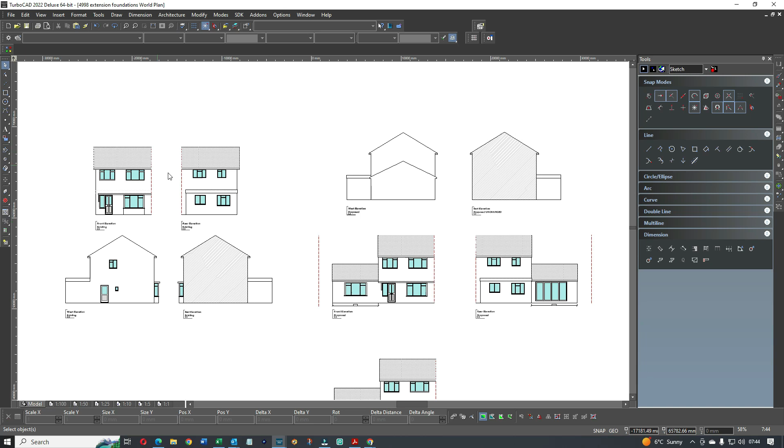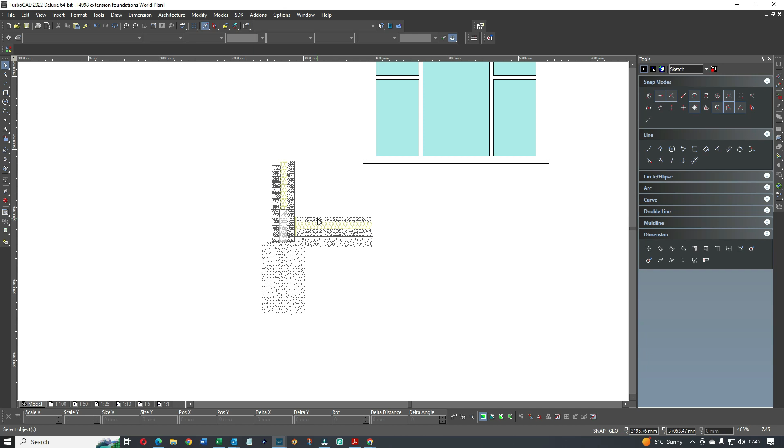I'm Tom Norris, and today we're going to take a look at trench foundations. Almost every extension you build will need foundations of some kind, and especially in the UK, we're looking at trench foundations for extensions of any kind. So what I've done here is taken one of our projects, a simple project where we've added an extension, and I've started to do a detailed section to show foundations for this particular property. Now it's not very pretty, but the idea is to give you the content and then you can work out how you want to do it yourself. If you're a young or budding architect at various levels of qualification, this would be pretty useful, because you're going to end up doing these, and it'll teach you what's required and what's pretty much standard.

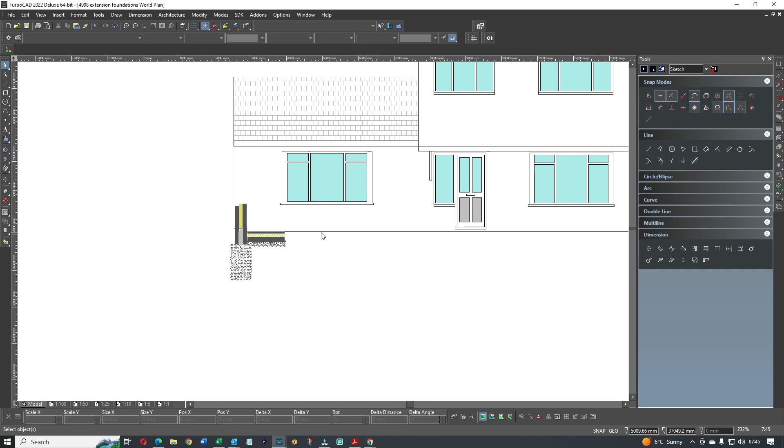So if we take this as the floor line, that line here, bottom of the building, generally speaking the DPC, as in damp proof course, is usually a bit above that, maybe 100 mil, 80 mil, 120, it varies, but this is basically the detailed section for that.

Now the foundations for an extension, single story extension, the standard varies with different soil conditions and different areas, and it's usually down to building control, because they've got the final say on it. But most architects and technicians will start off with 1000 millimeter deep by 600, and then it's up to building control if they want to extend it.

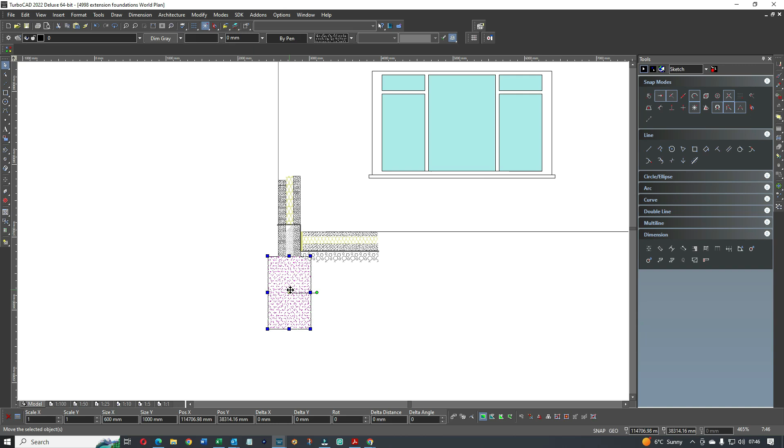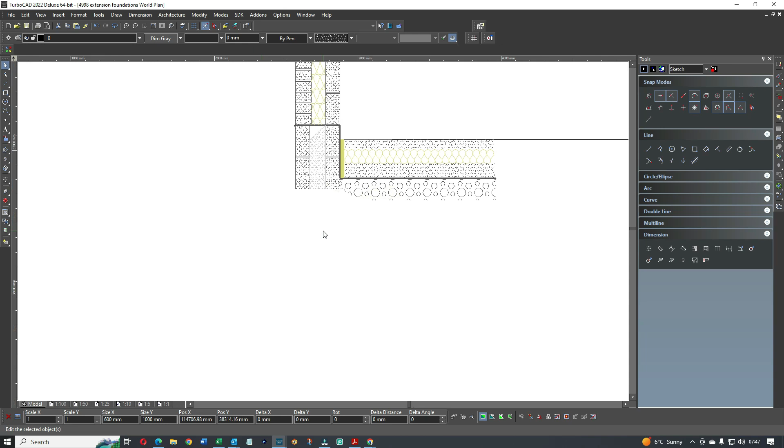So if I click on this, I've done a little square or rectangle, and I've hatched it with concrete. So what we're looking at here, if you look down the bottom, this is all to scale. We're using 1 to 1, and we've scaled all of these elements, as is the property. So if we look at that, we're 1000 by 600. That's your foundation, your trench foundation under all of the walls.

And what sits on top of that, we've got a couple of what we call trench blocks. Now you could use engineering bricks, anything that'll take you up to the DPC. So trench blocks or engineering bricks, or even commons, old bricks, cheap bricks if necessary if you want to get rid of them, just anything to get you up to DPC. And generally speaking, we infill this then with anything - I don't mean mud, but old concrete, rocks, stones, etc.

Right, so above the DPC, you're then looking at your walls, and the walls would be - this is a block wall inside. That could be a concrete block, or it could be a Thermalite block, variety of types for different reasons. So you've got a block going there, and then we've done 100 mil of insulation.

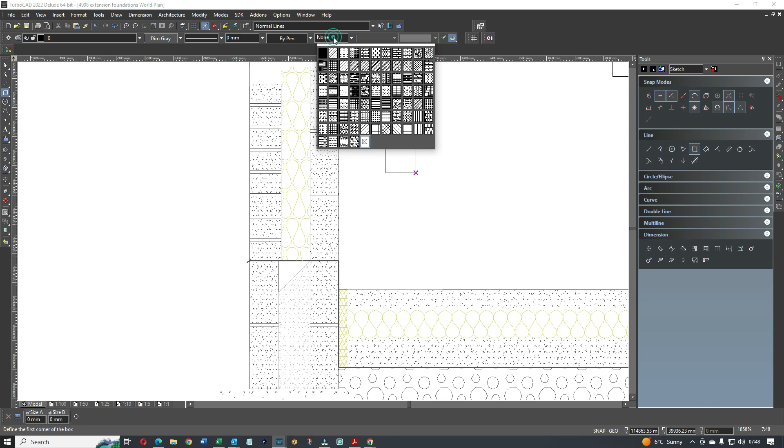So when you're on the drawings, when it comes to doing the insulation, what I see is some of the CAD packs don't have this hatch. So what I would say is you can go and download hatches. As an example, let me just draw a little rectangle here, and what we do is - there you go, that's our insulation one.

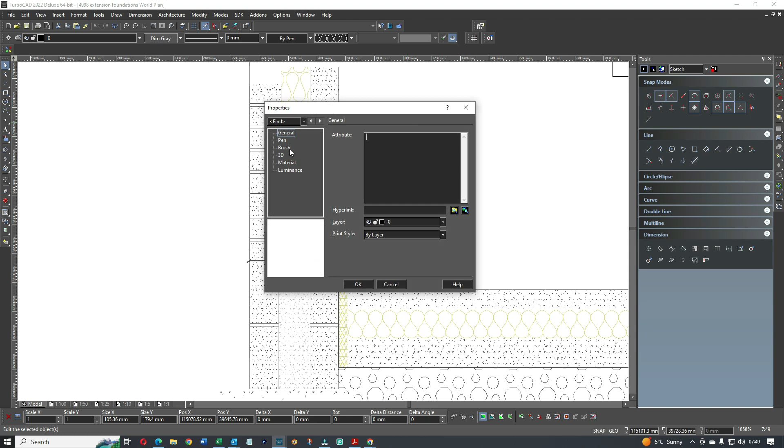Sorry, I've mucked that up, let me do it again. Need to focus. So right, I'm choosing a hatch, and I'm going to choose this hatch. Now if you click on it, you don't see anything, but you can see the hatch is showing there. Now what that means is you need to change the scale. I'm familiar that this scale for this particular one should be about 2 or 3, so let's just do 3. Okay, so if I extend the box - right, so 3 is relatively big, isn't it? So let's just do 1.5. There you go, starting to get reasonable.

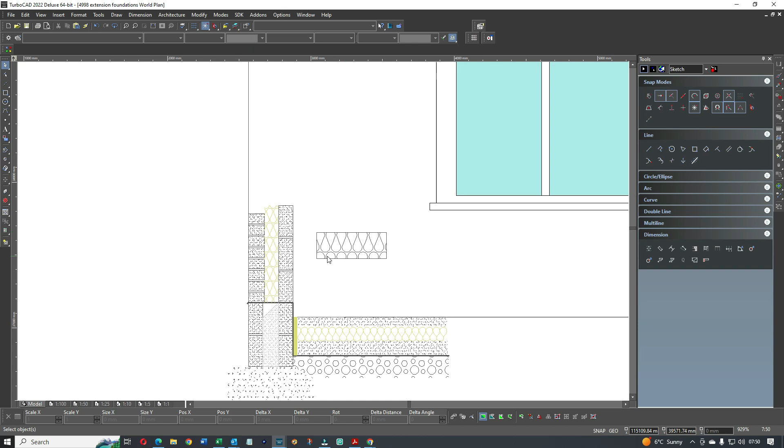What I was trying to say was that if you don't have this hatch, go find it, because there are loads of websites where you can download free hatches. We do it all the time when preparing detailed sections - for concrete, gravel, hedges, whatever you want. Make sure you get plenty into your portfolio so you can represent correctly, and of course you can color code them and change the color, like we did on this one.

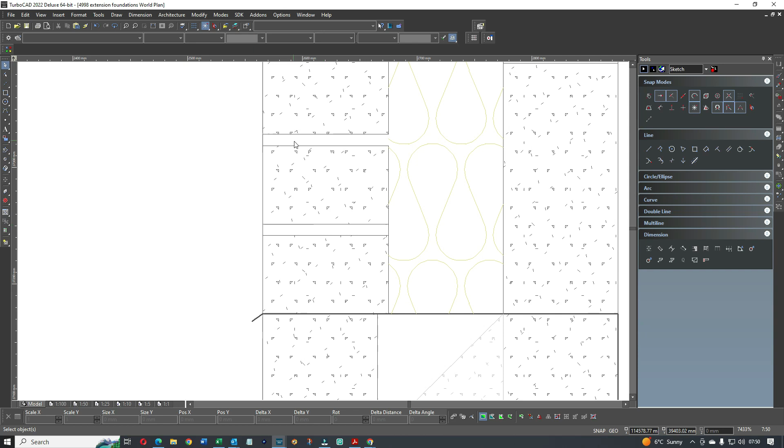So here we've got block on the inside, 100 mil of insulation in the middle, and brick on the outside. We use standard sizes for bricks, allow 10 mil - UK bricks are a standard size, you can look it up. Then we allow 10 mil for the mortar, the pointing, call it what you want. So brick, mortar, 10 mil, and you can build like so.

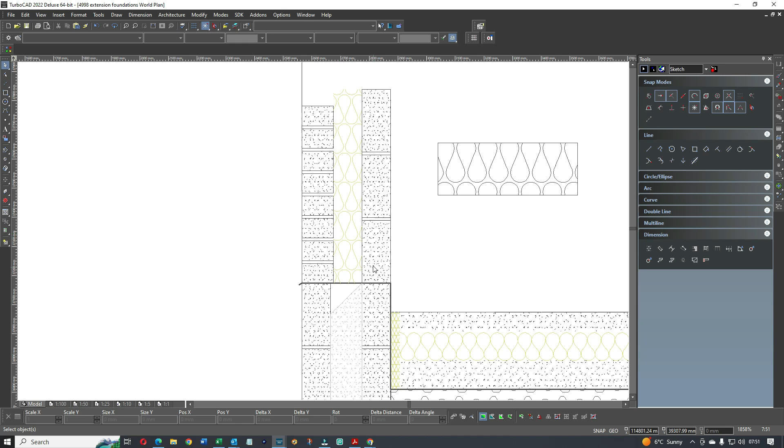So you've got your DPC. The DPC should ideally hang down a little - make sure it goes the whole way, you don't want any damp going up. So when it comes in, let's look at how we do the floor inside.

Generally speaking, this is your trench foundation - blocks, trench blocks, or brick. Engineering or semi-engineering sits on top. Here we've got gravel - this is just rubble, gravel, blinded with sand. Get it more or less leveled off.

On top of that we've got 1000 or 1200 gauge DPM. This usually goes down and comes up the wall to about there, certainly above the finished floor. And then the DPC and the wall kind of overlap.

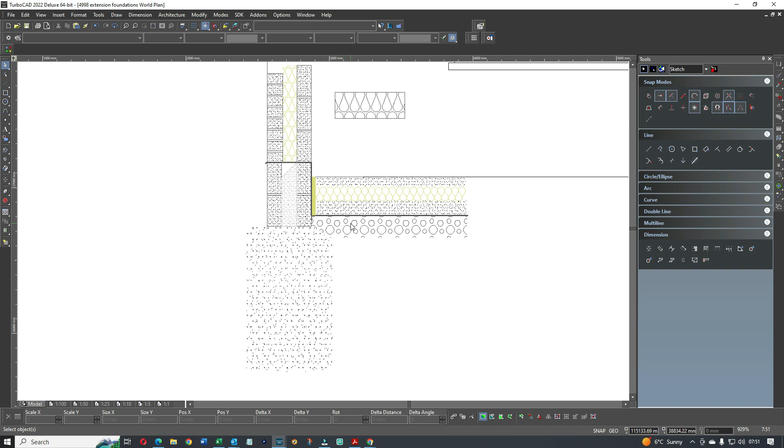Above the DPM, what we're looking at is say 100 mil of concrete. Make sure you get your insulation in here - don't let the concrete go all the way to the trench block. Make sure you get some insulation in there.

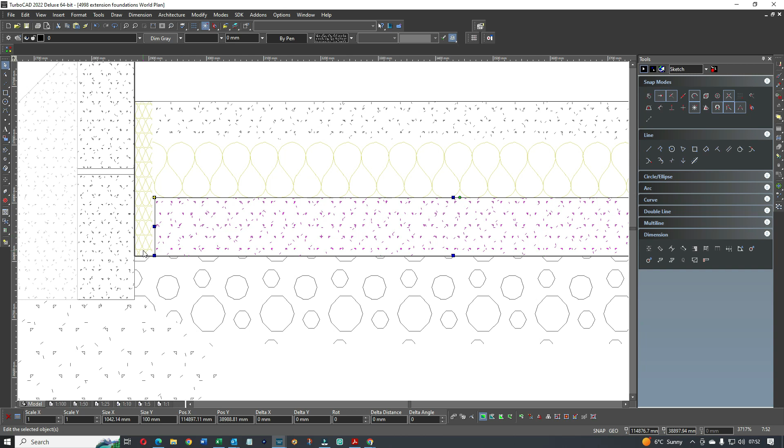I'm not going to give you all the details, you can look it up. But concrete slab, bit of insulation - what you do before you pour this is put the insulation, cut out some Celotex or the equivalent, put it all the way around the edges. Make sure you have insulation, around 50 mil all the way around.

Then you pour your concrete, and you've got your polystyrene slab on top. Here we're showing about 100 or 120 - this can vary depending on what you're doing, but you want at least 60. Let me check what we generally use here - Celotex, it seems 75 mil is generally what people do.

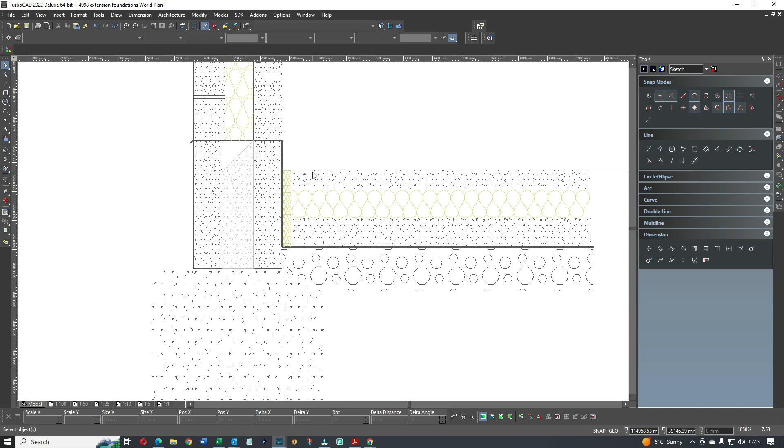On top of that, tape all those joints - when you pop them down onto the floor, they need to be taped. On top of that as a finish, you've got 65 mil of concrete screed, minimum 65 mil. If this was a detailed section for a client's project, this is fine as a sketched out item, but you need to add the details.

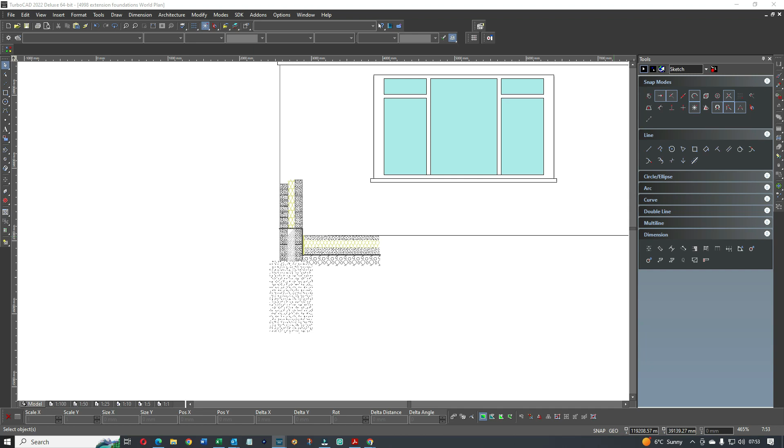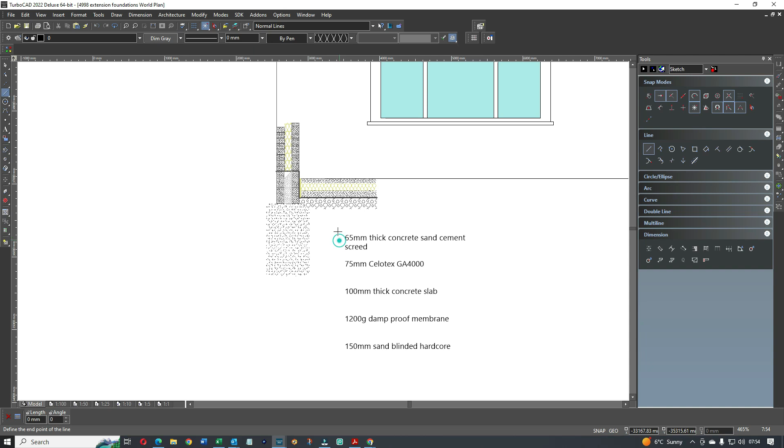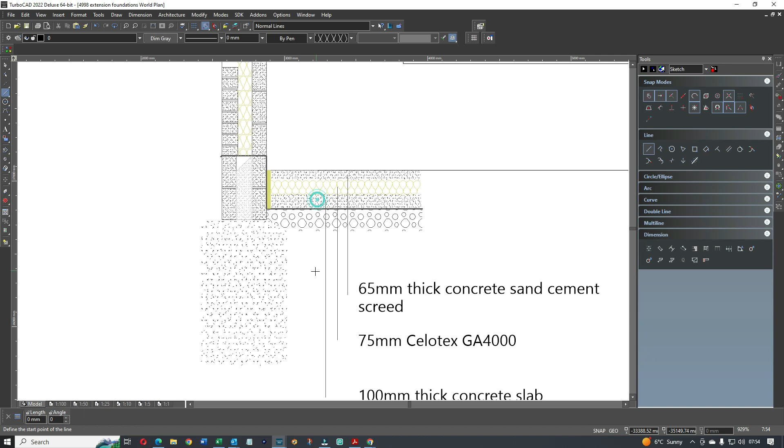So we're going to go from concrete screed - I'm going to turn off my snaps here so I don't have problems positioning. Concrete screed, Celotex will stop here in the middle, concrete slab which is here, damp proof which is there, and then the blinded sand which is there. Now that's actually not bad at all, but if you really want to pretty them up, you could balance them out a little.

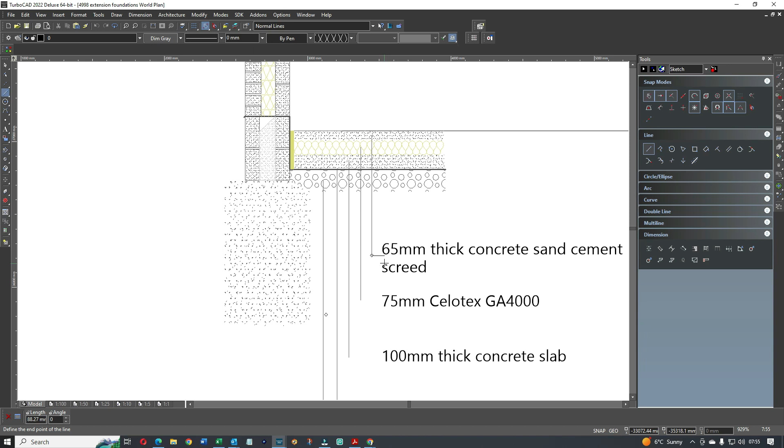They don't look so bad, but you know what I'm saying. So now what we want to do is, I can put snaps back on, and we're going to go. Yeah, that's great. I'm glad I put snaps back on. Not. Right. Snaps back on. So we're turning.

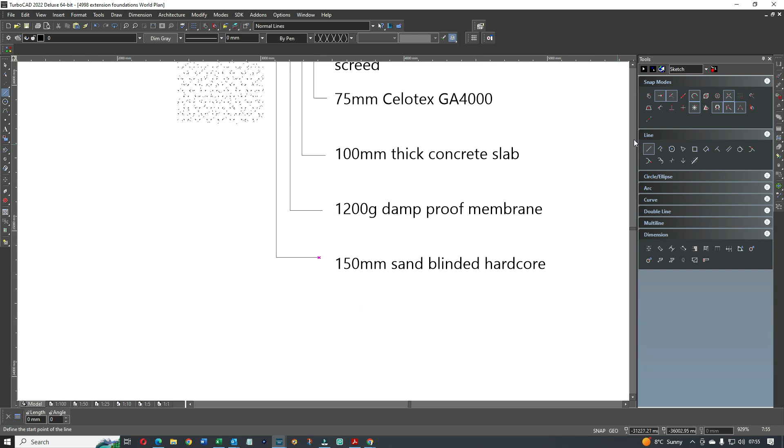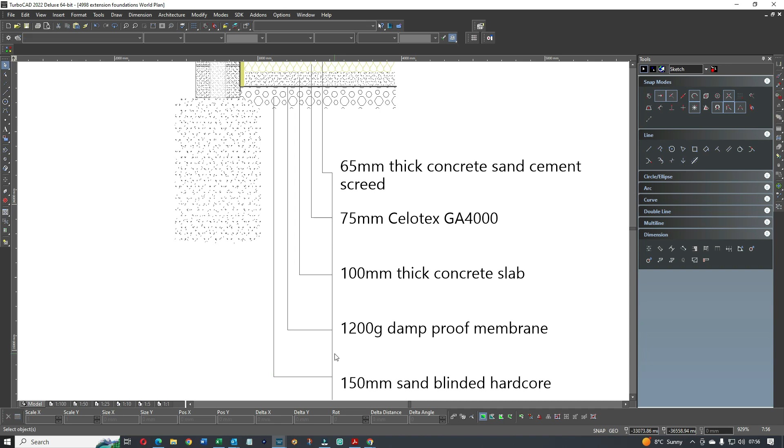Right, sorry, I'm mumbling a little. That's what happens when you focus. Right, so I'm trying to tidy this up to make it look a little bit interesting. So let's get these lines working here. Yeah, the detailed sections, they all take a little bit of time, but once you get into a format for doing them, and you kind of know what it is you're doing, then you should be fine. But the idea is you've got to make it look a bit nice, so you've got to take a bit of time setting it out.

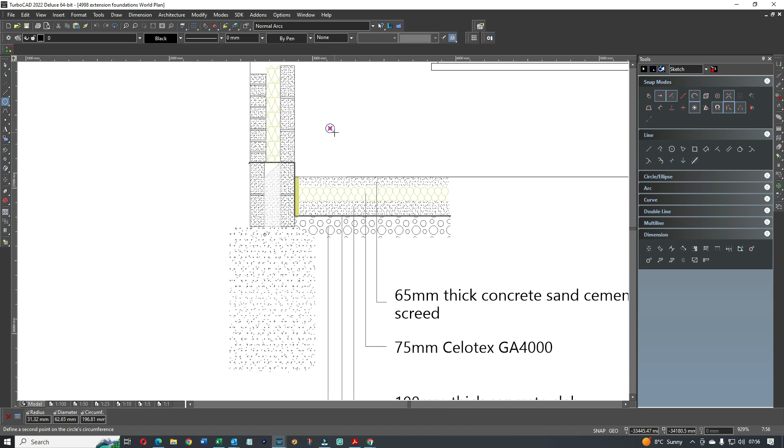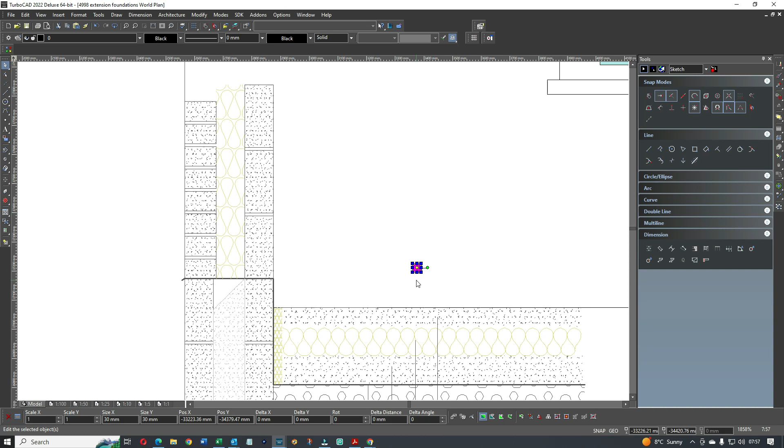Now, what I generally like to do on the detailed sections I create is I like to put a little circle at the end of the line. So let me show you what I mean here. So I'll just fill this in black, and I'm going to reduce it down to about 30. And what I'm going to do is I'm going to go Control C, Control V, Control C. All will be revealed. You just have to be patient with me.

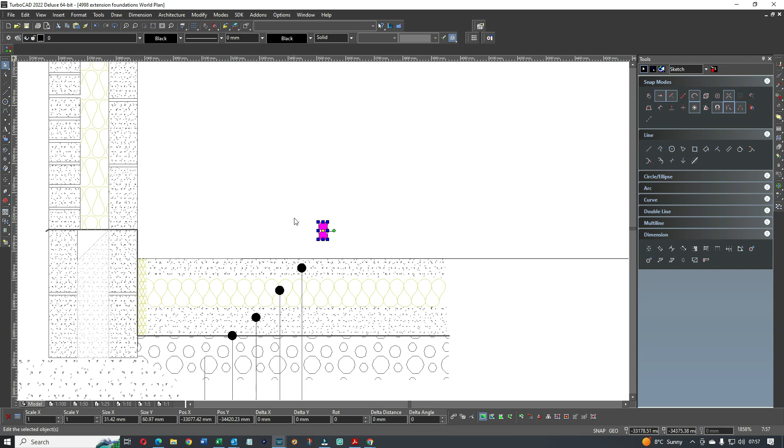Now, you get what I'm doing here? So let there be no doubt as to what it is I'm doing. Another one, is it? One. Okay, so there you go. That's how you write it up. So now on the other side, you can write residual cavity, DPC above ground level, 45, 50, 100 Celotex. Depends what your architect says. It depends effectively whatever you want to put in there, but the builder doesn't decide, the architect or designer or technician.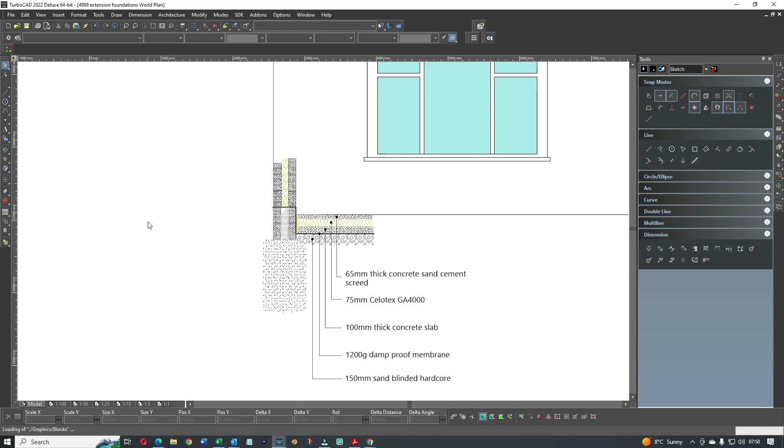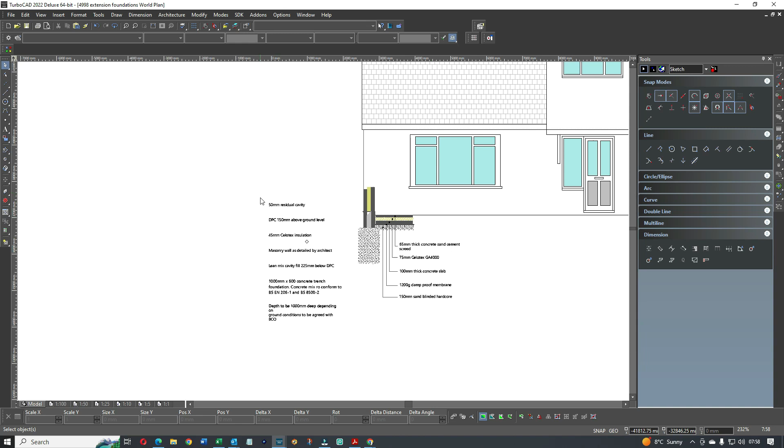The cavity fill, the trench foundation, usually I'll give you an example of what goes in there on the foundations. Well, I give you an example on all of it, and then you can come back to this video if you want to make a detailed section. This is all the information you need. So DPC, you used the lines again, used the little balls, but basically keep it to scale. That's what I'm saying on here, and if necessary reduce the size of the font so that you end up with a detailed section. This is roughly what it looks like.

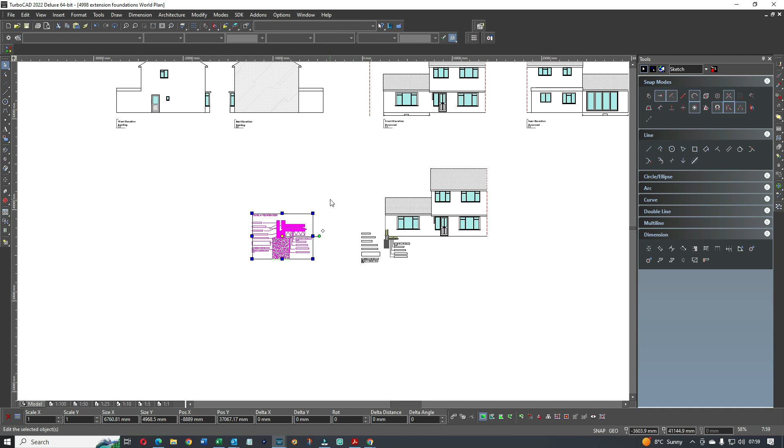A detailed section. I'm going to show you a completed one which is separate. So sometimes what we do is we don't add the section to the house, but we provide a detailed section here. So that's a detailed section for a trench foundation, and that we would put in standard on most house extensions when we do building regs. So you need to copy that, draw that up. This one isn't to scale, whereas this one is, so it looks a bit different.

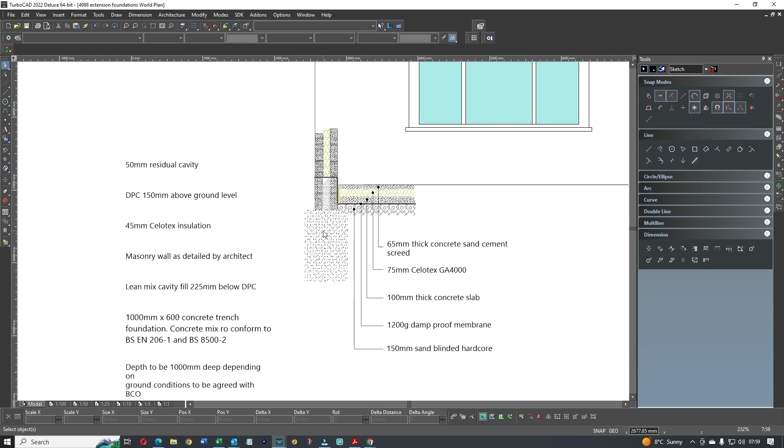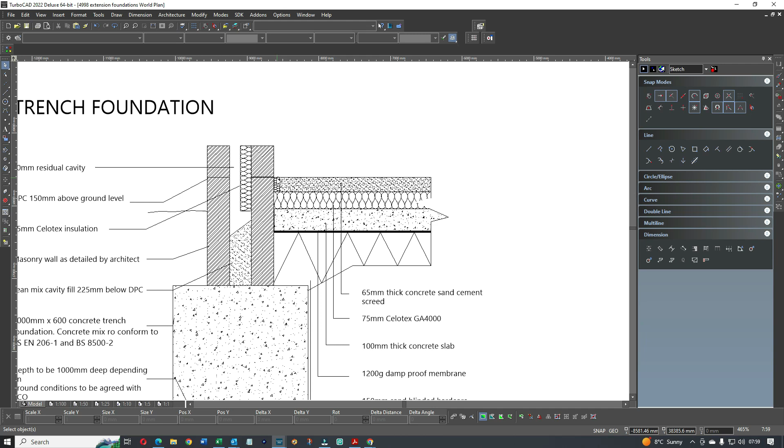But generally speaking, we're covering the same items, as in stones, rubble, etc. Then DPM, concrete, insulation, and then the finished screed. Now don't forget that insulation. A lot of the builders forget the insulation at this point. You mustn't do that. Right, I think that's all you need to know for creating a detailed section for trench foundations. That's fine. Brilliant. What can I say?